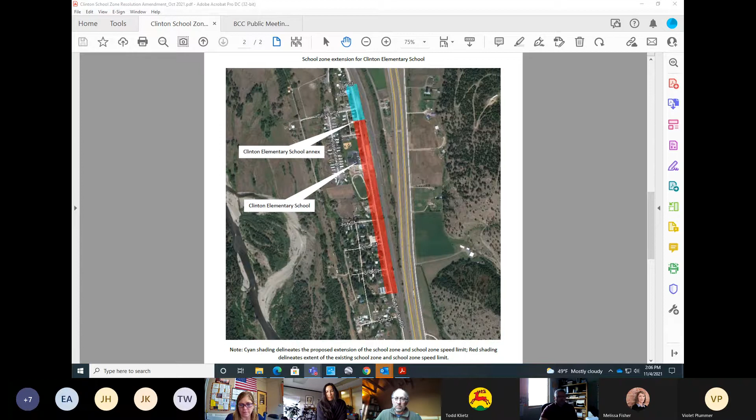Any public comment? Okay, seeing none, I'll close the public hearing.

Any questions, Juanita? Nope, this seems delightfully straightforward, and yes, we want to keep our children safe. So I don't have any comments other than I motioned that we consider a resolution to extend the school zone and the school zone speed limit on East Mullan Road at Clinton Elementary School.

Okay, I will second the motion to adopt the resolution. Any further discussion on the motion?

I just want to thank Eric real quick for his work and for coming out and walking through it all with me and making sure that this happens. So thank you, Eric. You're welcome.

Any further discussion? Okay, seeing none, let's go ahead and vote. All in favor? Aye.

Okay, there you go. Thank you both. Thank you.

Thank you. Okay, our second public hearing, which I'll open, is on a proposed 310 permit related to the Riverfront Triangle Phase 1.

And Todd. Do we not? Todd, there you are. It looks like you're muted. Good afternoon, Commissioners. This is Todd Klietz, Missoula County Floodplain Administrator.

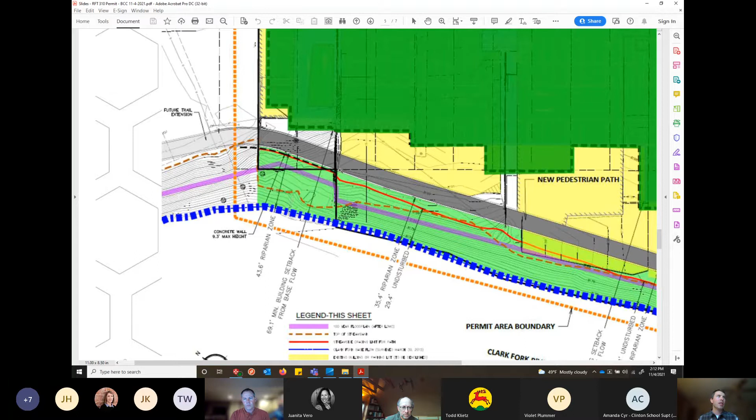I want to clarify that, and then go through a few things we're doing to make specific riparian accommodations, both with this Phase 1 310 permit and the Phase 2 310 permit we'll submit within the next year. First, we're not doing any stream or work in the stream. We're minimizing to the extent possible the work on the stream bank. We have one pipe that'll need to be removed with the building demolition. We think it's part of the roof drain system.

To the extent possible, we're protecting the existing riparian vegetation that's out there, especially the mature trees. In this Phase 1 permit, we're just trying to remove what's out there, but unfortunately some of it's tangled with the existing vegetation, so we're trying to limit that to the extent possible. We're planning to delineate the clearing limits during construction, so there aren't any oopsies during clearing of vegetation that's supposed to be preserved. We've specified additional BMPs, namely a berm that's going to go between the site, the demolition construction, and the stream bank itself.

That berm will help contain the runoff during that period. The project will have to have a SWPPP. The contractor will have to have a stormwater pollution prevention plan they submit to DEQ, which will have additional BMPs other than that berm. It will also specify temporary and permanent stabilization that has to occur. Temporary stabilization means any area left dormant for 14 days has to be stabilized. Before they can close their SWPPP out, they have to permanently stabilize the entire site with appropriate vegetation.

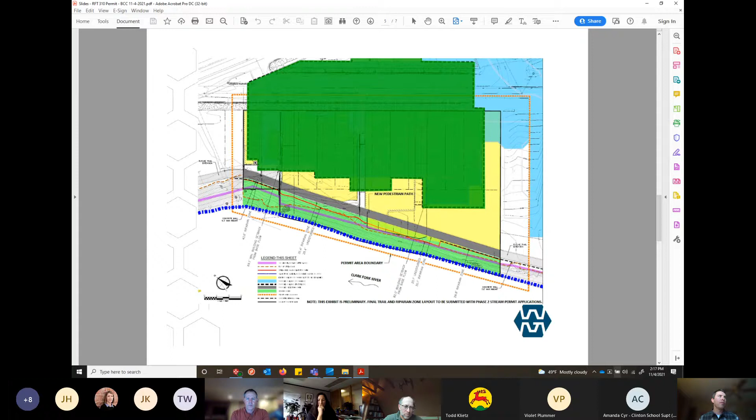Thanks, Eric. Yeah, thanks. And before we go to you, Todd, Ryan, did you have anything else you wanted to add? No, Todd and Eric are doing a great job. Thank you, Commissioner. Okay, thanks.

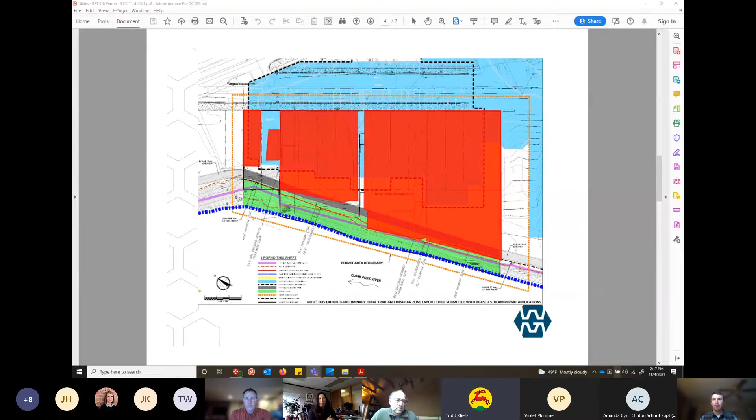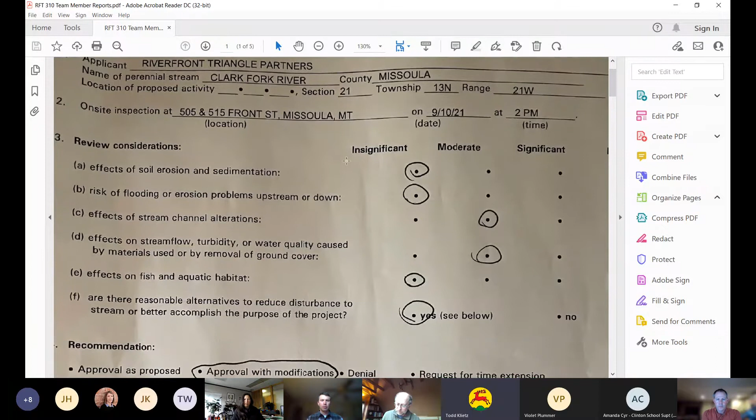Todd? Yeah, so if I can share, what I want to show you are the 310 permit reports. These were prepared by your 310 team, and the 310 team consists of Elena Evans from the Water Quality District and Ladd Knotek from Montana Fish, Wildlife, and Parks. We'll briefly go through these insignificant considerations. You'll see that they're marked, some moderate considerations, nothing significant. I believe this one was from the Water Quality District. They do have some specific recommendations, and I believe Eric's addressed some of those.

From Water Quality District: a revegetation plan, timing, and plant survival rates should be identified prior to removal of current structures and grading, and best management practices for reduction of silt should be adhered to and maintained.

The revegetation plan, regardless, there's a bit of unknowns here. We don't know for certain if that variance setback is going to be approved or not, so we don't know for sure if there's going to be a public walkway there. And if there is, we don't know at this point if that would be the applicant constructing it, or if that could be the City of Missoula. Regardless, they will have to come back through a permitting process with us for a 310 permit, or with Fish, Wildlife, and Parks for a 124 permit. Both of those processes will address revegetation plan, timing, and plant survival rates, so that will be addressed in the future.

Now looking specifically at Fish, Wildlife, and Parks recommendations: the specific recommendation down at the bottom is minimal disturbance to existing woody vegetation. That's why Eric had indicated they're going to do some work. There is a waste pipe down there, but it's not immediately surrounded by any woody vegetation, so it's not going to disturb any of that vegetation.

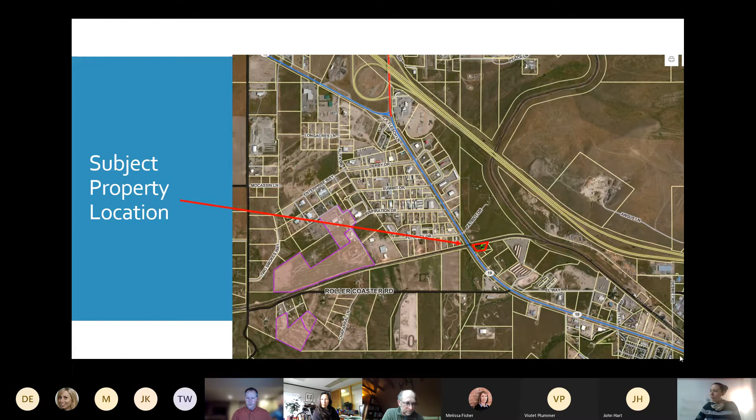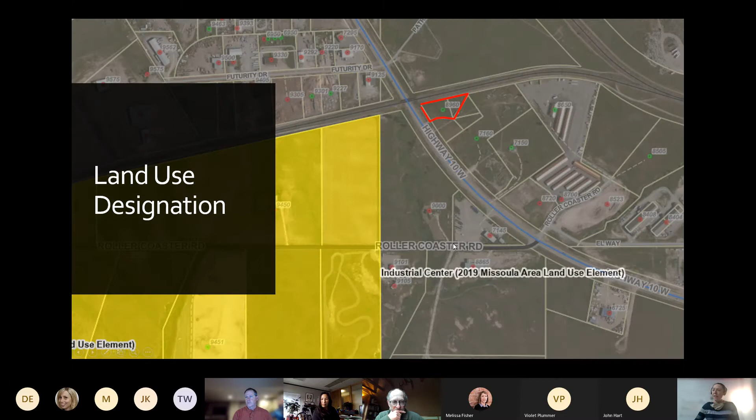It is involving 2 of the lots. It's zoned industrial, CI1. It's a commercial subdivision that was approved, and the zoning does match the land use element for the industrial center as well. Sorry, I get going too far ahead in my brain.

Bailey, maybe you're going to note this, but if folks are having a moment of deja vu, this is not the first time this is being brought forward. This is a continuation of a discussion that was begun, a public hearing that was opened some time back.

Yes, that's correct. I was going to bring that up. On May 27th, this request was brought before the Board of County Commissioners with a recommendation for denial from staff, based on comments submitted by the Missoula Rural Fire District. They were proposing to amend condition number 8 of the subdivision. This subdivision was approved in 2018 for 5 lots for commercial use, in compliance with zoning. Condition 8 required fire sprinklers be installed in all new buildings within the subdivision, and they're requesting to amend that only for lots 4 and 5 to allow a water storage system in lieu of fire sprinklers.

So the original condition would remain for lots 1, 2, and 3. They've been working with their representative to come up with the required water supply calculations, which were submitted. It would be made up of 2 5,000 gallon storage tanks located along the internal subdivision road.

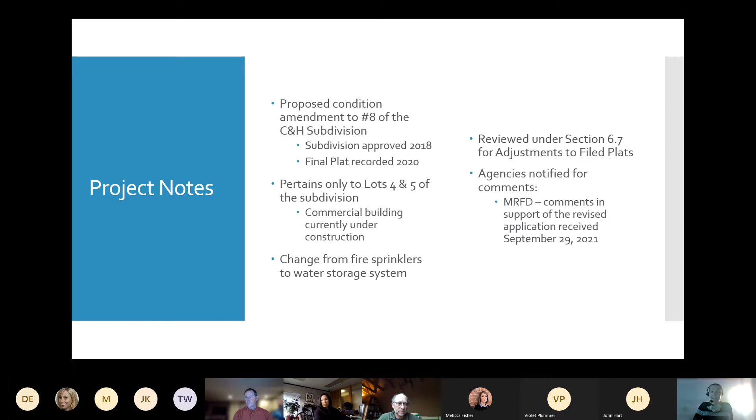And we sent that back out for agency comments, and Missoula Rural Fire has submitted new comments in support of the request based on that updated information. So we did review the request under section 6.7 of our adjustments to filed plats, because this is a filed final plat, not a preliminary plat. And so we are recommending approval, but we do have some conditions.

Obviously, the language needed for condition 8, which is the one they're amending, would need to be modified a little bit. So we have some draft language to be added. It's a weird situation—we don't want that condition wholly removed, because it still has to apply to lots 1, 2, and 3. So we have an additional paragraph that would be added to condition 8, specific to lots 4 and 5 regarding their fire suppression plan.

And that also includes the requirement for a fire alarm system to be reviewed and approved by Missoula Rural as well. And then if the condition is ultimately approved by the commissioners, it kicks in two other things that would need to happen.

One is there is specific language within the recorded covenants requiring fire sprinklers in all buildings that would need to be amended for this project to go forward. We have draft language for that—it's what we use when we have this type of project come through. They're pretty consistent conditions we'd see on a normal preliminary plat.

But also there is a note on the face of the filed final plat that would need to be tweaked or amended. So we have a condition requiring not a whole new plat, but just an affidavit recorded as an exhibit to the filed plat, stating that lots 4 and 5 have had this condition amendment. It still keeps everything in place for lots 1, 2, and 3, with just these extra things. So that's what we're recommending with our conditions.

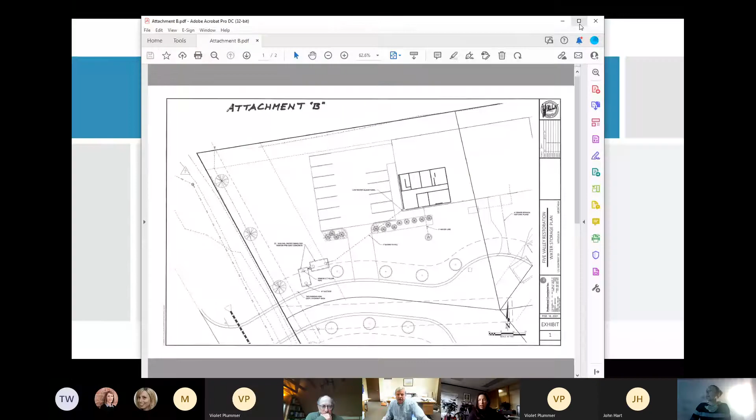So, hopefully you guys can see this and I can zoom in here. So here's where Professional Drive and Highway 10 meet, and these would be the two tanks—this is their proposed location. And so the building, yeah, and the parking and things like that.

I did also run the request by Public Works since this is a private road, not a county road. So there weren't any issues with the location, like any permits needed for encroachments in the right of way or anything like that.

The only concern Public Works had—Brent O'Connor has been in contact with PCI, and I believe they were meeting on site with the property owner—is just making sure it won't mess up any of the stormwater drainage plans, because I believe there's a proposed retention pond or some type of swale out there. That was mainly Public Works' concern, but it wasn't a deal breaker, just making sure everything stays in line.

Okay, thanks, Bailey. Thank you. Any public comment on the proposed condition amendment?

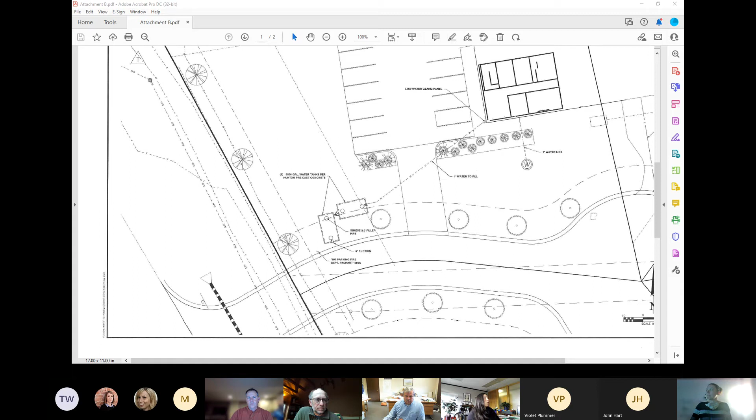Seeing none. Any other questions, Juanita? No. I move that the board approve the condition amendment for the C&H subdivision with the recommended conditions of approval as detailed in the staff report.

I will second that. Any further discussion? Seeing none, all in favor? Aye. Glad we could get here. Thanks, John and Bailey, for hanging with this and coming up with a workable solution. Yeah, appreciate it. Thank you. All right, thank you.

And last but not least, John Hart—I'm assuming this is to you, or maybe it's Bailey. I'm still looking at you. Whoever wants to provide an update on where we're at with the West Point phasing plan extension. Don't scare me like that, Commissioner.

Go ahead, Bailey, she's the expert on this project. I'm the expert, but yeah. I only know enough to be dangerous. Oh gosh, see Ryan nodding as well. I'm like, I'm now the expert.

I did get an email. So after Monday's CAPS update, I received an email from WGM, from Jamie, requesting that we postpone this item again to December 2nd. The reason we have to keep postponing this is because the subdivision has an expiration date, so we can't just push it out whenever—we have to keep moving it to show we're doing this within the timeline. So that's why they're requesting to postpone it again.